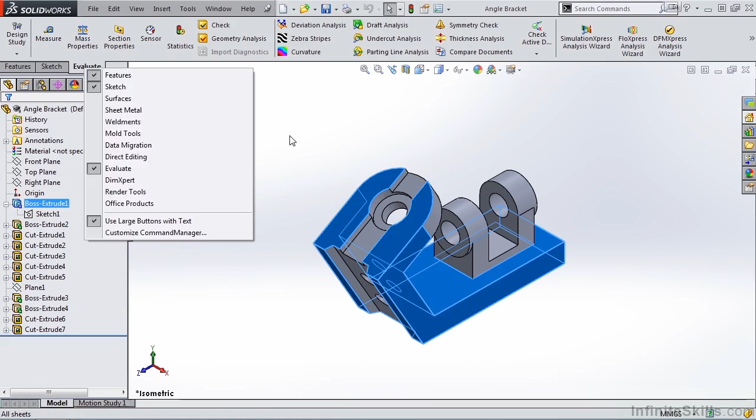In the top middle of the graphics area, we see a heads-up view toolbar. This is a handy way to get to some of the most common commands that you use when creating sketches, parts, assemblies, and drawings. For example, zoom to fit, zoom to area. Here's a very useful one: previous view.

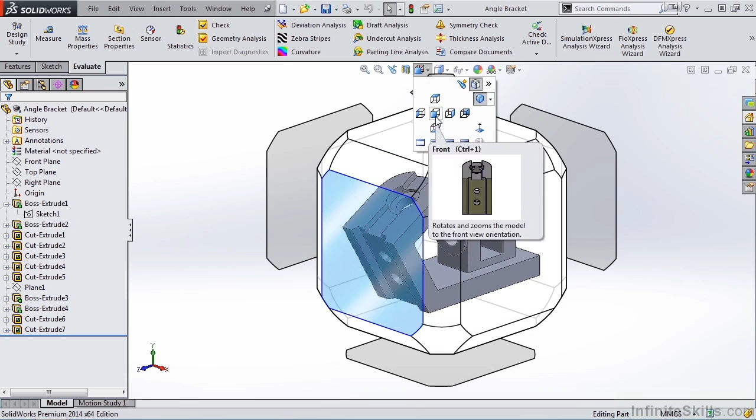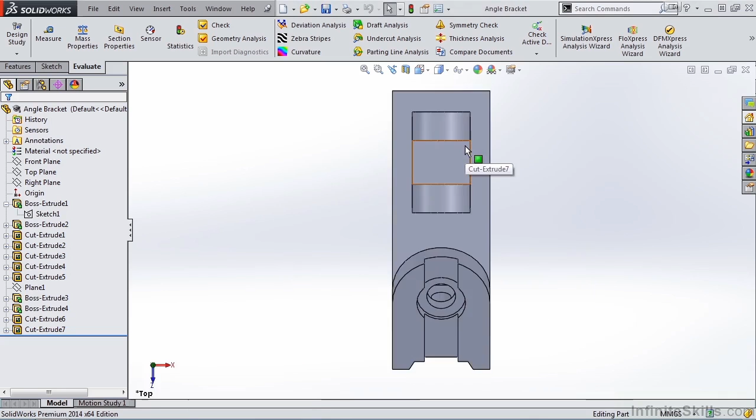We then have our different orthographic views: front, top, bottom, left, right, and rear. If you have this button here activated, the view selector, by simply tapping the space bar, you can select a face to give you a certain view, for example the front view, or the right-hand side view, or the top view, or an isometric view, and that isometric view can be from any one of the corners, or even a bottom view. Let's go back to an isometric view and select the spacebar one more time.

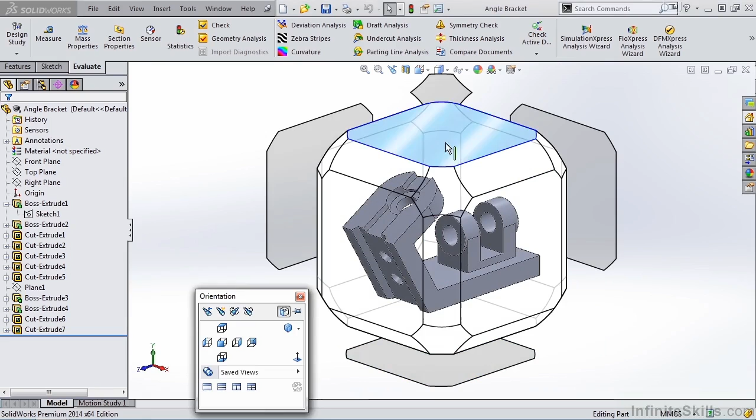Now notice we can also select the edges. But if you look closely, there's a couple edges and corners we cannot get to. For example, this back edge here and this back corner. So how do we get to those? We simply hold down the Alt key and it lights up, or highlights, that back edge.

So this view cube is very handy. I think you're going to find this very easy to use and a quick way to move your view around on the screen to give you different perspectives. Along with that, we have a drop-down menu, which allows us to view or not view items on the screen, along with some appearance settings.

Now to the far right, we have this item called the task pane. In the task pane, we can do many different things. If we expand it, we have access to many SolidWorks tutorials. Very handy. Along with these Infinite Skills video lessons, you will find many tutorials inside of the SolidWorks software.

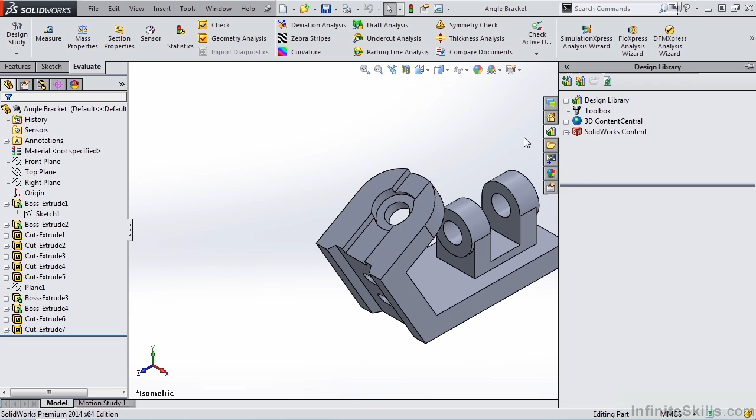We also have a selection for the design library. We can go out to different vendor sites and pull components into our parts and assemblies. We can also create drawing views, change appearance, and set custom properties. A lot of information here, more than we can cover in this lesson, but it gives you an idea that you do have many resources here.

Now, if we go into the assembly environment, you will see that the user interface looks very similar. What is different is the Command Manager. You will have different tabs, different ribbons, because we are in a different environment. And the same is true with the drawing environment.

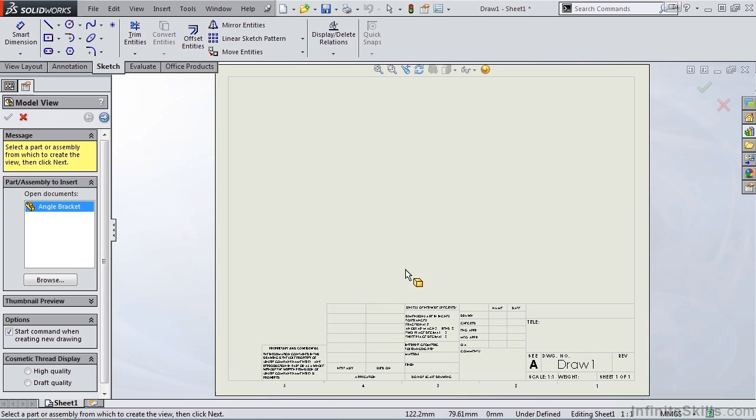Again, the screen looks the same. However, we do have a drawing sheet here, but we still have the Feature Manager design tree along with the Command Manager and some different ribbons. So that gives you a good idea of the SolidWorks 2014 user interface. Now let's move on to the next lesson.